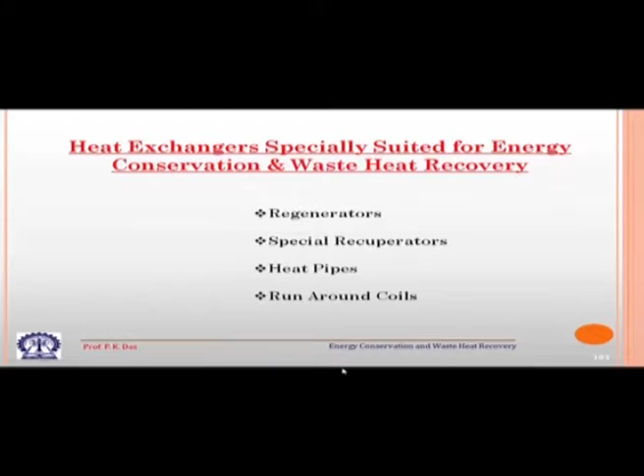So let us look into the slide. Heat exchangers specially suited for energy conservation and waste heat recovery: first type are regenerators, then there are certain special recuperators, one or two I will discuss, then heat pipes, and then run around coils.

Out of this, heat pipes are very special. They are used for different kinds of industrial applications and obviously they are very good devices for waste heat recovery and energy conservation. I will not discuss this - the other instructor, Professor Anandaroop Bhattacharya, will talk about heat pipes in detail and you will see how these unique heat exchange devices can be utilized for waste heat recovery.

So we will start with regenerator. Now, regenerators are of different types. Regenerator means a kind of heat exchanger in which the heat transfer is indirect, that means the two fluid streams are not mixing with each other, nor are they exchanging heat across some sort of a solid barrier continuously.

What is the working principle of a regenerator? First, let us say there is a hot stream. We need to extract a certain amount of heat from that hot stream. So the hot stream is made to pass through some matrix or storage material.

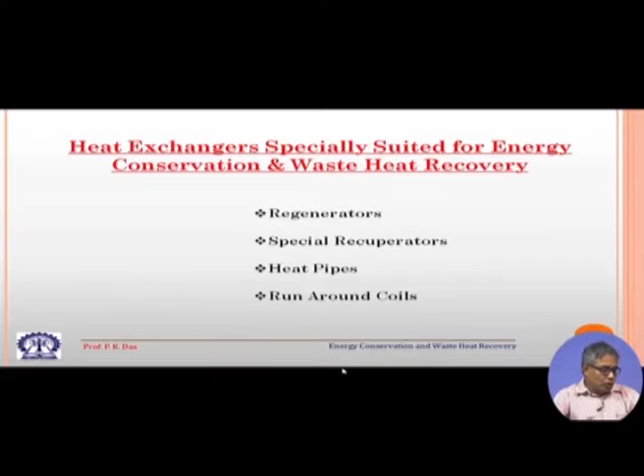So in a regenerator, this storage material is very important and that is sometimes also called a matrix, as I have mentioned. The matrix could be stationary, or we can have some sort of rotation of the matrix. So let us explain this with the help of a diagram.

So first we can see the fixed twin bed regenerator, and in these, two box kind of arrangements are called beds. In this bed we have got storage material or matrix. So generally these are porous material.

So they will have a solid component which can store thermal energy - they should be good in storing thermal energy. At the same time, these beds will have porosity or some sort of interconnected channels through which the fluid stream can pass, and in most applications as fluid stream we are having gas - some sort of gas as fluid stream, or we are having two fluid streams, so two gas streams we are having.

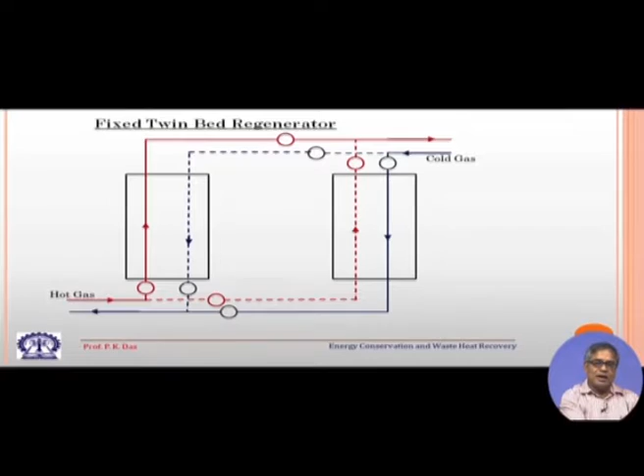Now, what is the advantage of using this storage material is that the matrix construction is such that it will give very large residence time and very intimate contact between the solid and the flowing gas, which is not possible when there is a flow of two gas streams and they are separated by some solid wall, which is there in most of the other heat exchangers.

So if I have to explain the working principle of this fixed twin bed regenerator - let us say this is a fixed bed, so some hot gas is coming. In the gas stream, this red line is the hot gas line. In this line there are a number of valves. Let us say what we do: we close this valve and we open this valve.

So the gas stream is now made to pass through this first bed - it is made to pass through this first bed and then it is passing through this. Here this valve is closed, this valve is open, so the gas stream is going out, but when the gas stream is going out, already we have extracted a certain amount of heat, and that is being kept stored within the storage material in the first bed.

Now there is a cold stream also. Once the hot gas stream has passed through this first bed, the cold stream follows this dotted line. This valve has been opened, this valve has also been opened, but these two valves are closed. So the cold stream is coming through this dotted line and passing through this first bed. The first bed, when the cold stream passes through it, is already very hot, so the cold stream will pick up certain thermal energy, and now I have recovered certain amount of thermal energy which could have gone as exhaust with the hot gas, and that can be utilized.

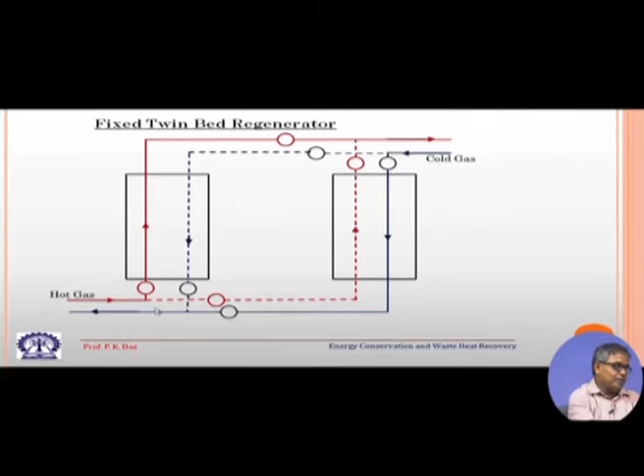But when the cold stream is passing through this first bed, what is the hot gas stream doing? The hot gas stream is bypassing the first bed, but it is passing through the second bed. So when the cold stream is passing through the first bed, heat is extracted from the first bed by the cold stream, but at that time the second bed is being heated and is in the process of being made ready, so that at the next instant the cold gas stream will pass through it and pick up certain amount of thermal energy. So this goes on.

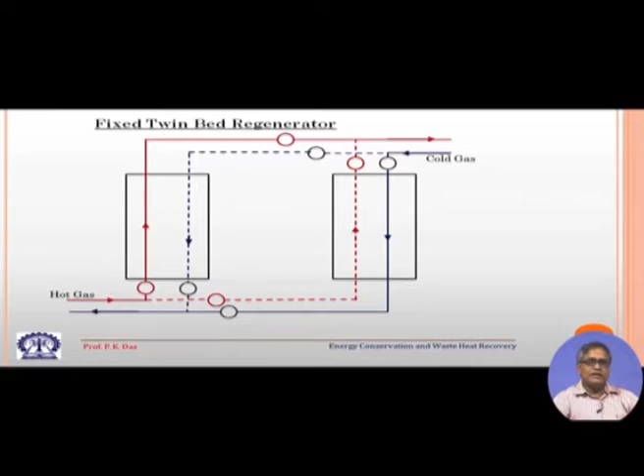By switching these valves, the hot gas stream is directed once through the first bed, next through the second bed, and the cold gas is directed once through the second bed and next through the first bed. This continues, and there could be more number of beds. The simplest is the twin bed regenerator, but there could be more number of beds, and by that we can get a good amount of heat exchange or thermal energy recovery from the hot stream to the cold stream.

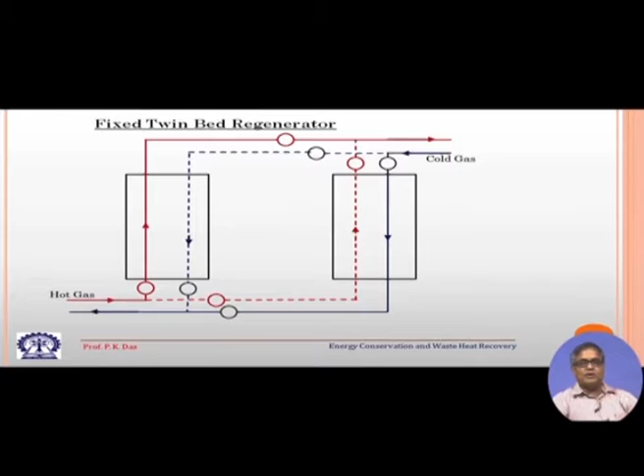Now this is one arrangement, and here these valve operations are to be done, generally automatically. One needs to know how much time one gas stream should pass through a particular bed, and accordingly the valves are to be operated.

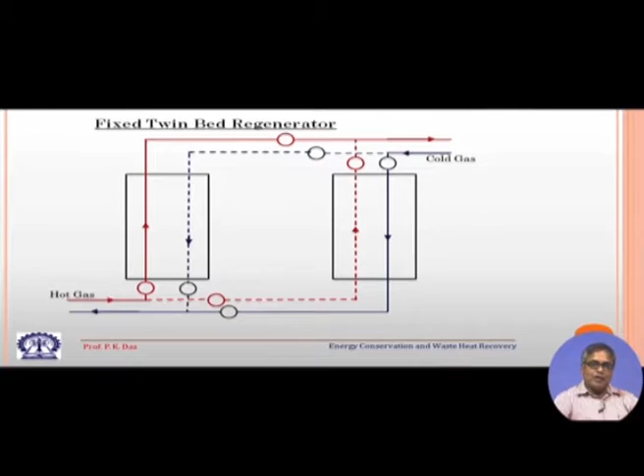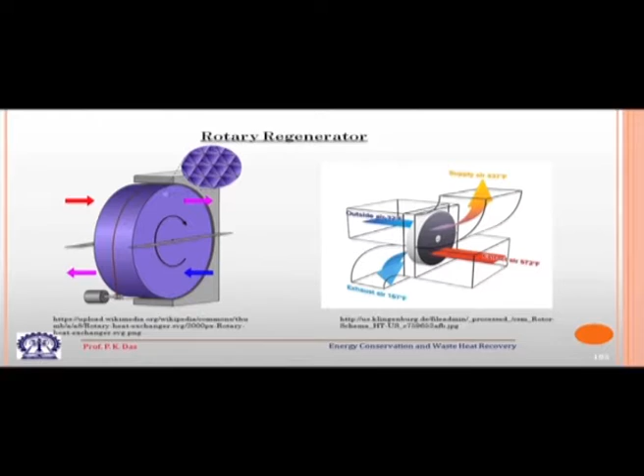In our earlier application, when we looked at the fixed bed kind of regenerator, we saw that the beds are fixed and the fluid switches off from one bed to another. Here the fluid flow path remains constant, there is no switching off for the path of the fluid streams, but the regenerator is not fixed, it goes on moving in a circular geometry, so it goes on rotating. This is for recovery of thermal energy.

There are designs where this matrix material is coated with some sort of special chemicals, so some amount of latent heat also can be utilized. Those special designs are possible. So both sensible and latent heat transfer is possible with the design modification of this rotary regenerator.

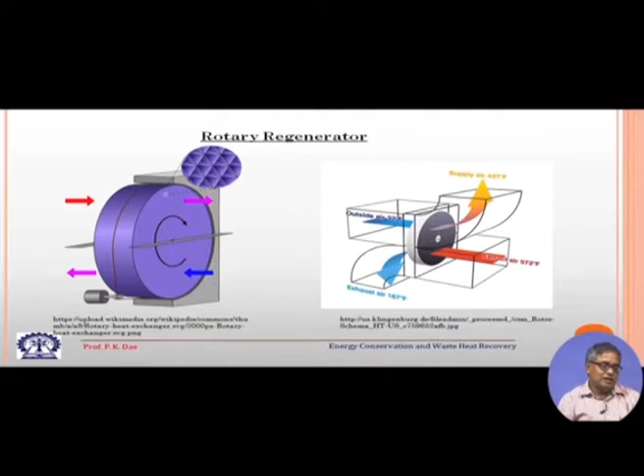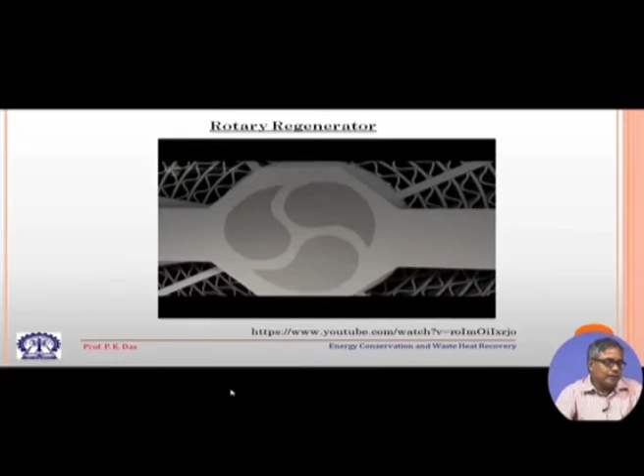With this, there is a small animation which I like to run for you. It is self explanatory and you can see what is the physical construction, how the gas streams flow through it.

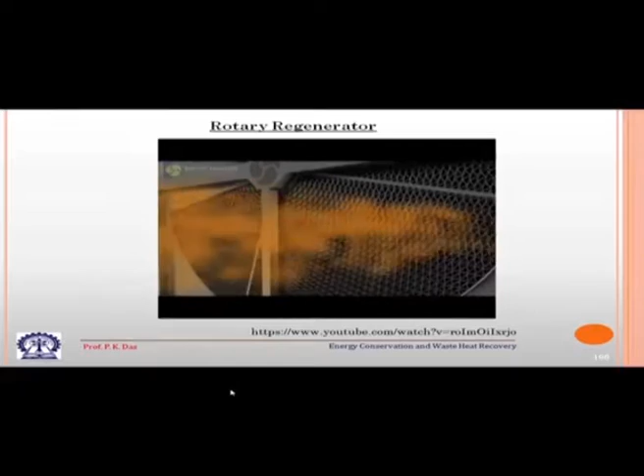So this gives us some idea regarding the rotary regenerators. So rotary regenerator has got a wheel which rotates, and that is why it is also called heat wheel.

Almost similar kind of construction, but a slightly different design is possible: regenerator with a rotary hood. Here also we are having some sort of a wheel for regenerator, and this wheel will have matrix.

We have got fixed cold gas path and hot gas path. So you can see this is the hot gas path and this is the cold gas path, but there will be a rotating hood or rotary hood, shown like this. This goes on rotating, at one instant of time or for some duration this will be on this side, and for the rest of the duration it will be on the other side.

When it is on this side, let us say cold air is coming in, and the cold air has to go through this path and pass through the matrix material, which is already heated up by the hot gas. So the cold air will pick up certain amount of thermal energy, its temperature will increase, and warm air will go out.

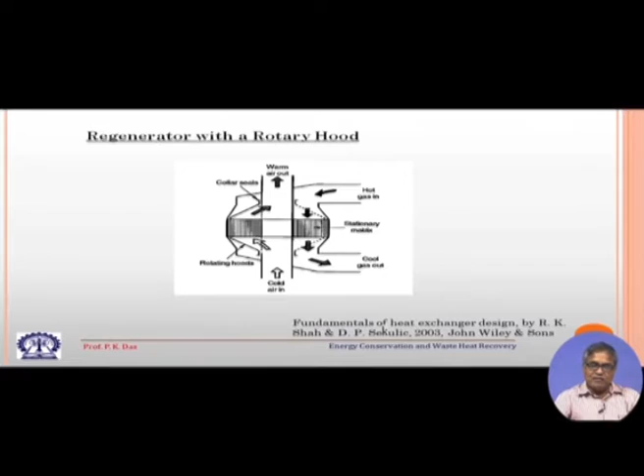For this kind of regenerator, the speed of rotation is very low, because there should be good amount of time given for the heat exchange to take place between the flowing gas stream and the matrix material. The wheels are very large, the gas velocity is also low, so that good amount of heat exchange takes place.

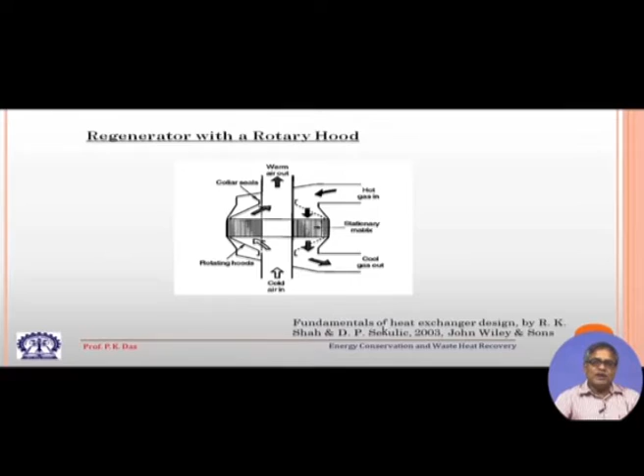One can estimate the heat transfer from regenerator or heat wheel. The analysis is made with lot of simplification. We are not going through the analysis, but I like to give you the relationship, which is approximate, but it gives you some idea on which parameters the rate of heat transfer depends.

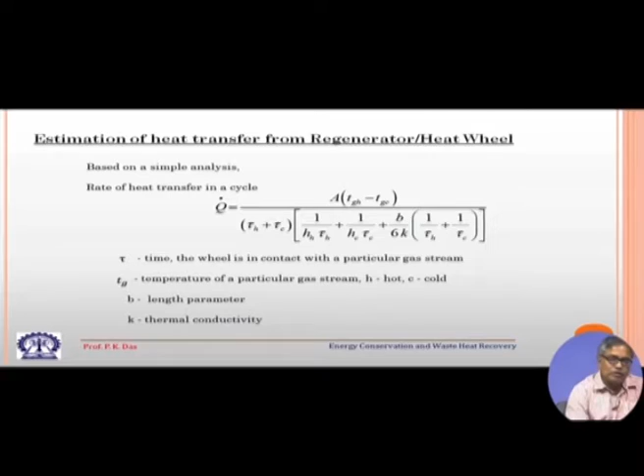With this we have got some idea regarding the regenerator, which could be fixed bed type or which could be a rotating bed type. So there are other kinds of design also we have seen.

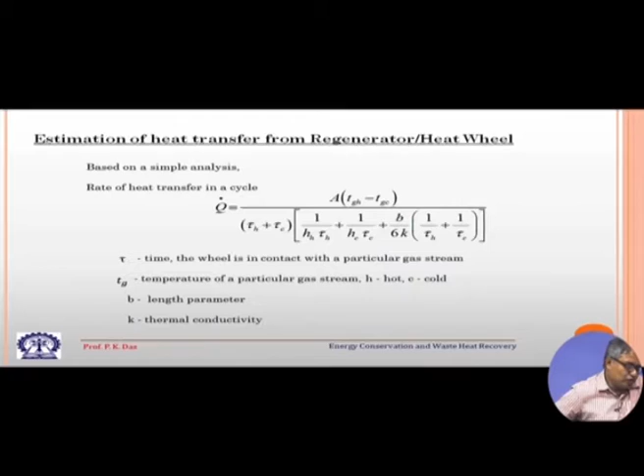With that, let us go to special types of recuperator. Now, if we see heat exchangers, there are different ways of classifying heat exchanger. One way of classifying heat exchanger is that we can classify it as recuperators and regenerators.

Recuperators means continuously there will be heat exchange between the cold fluid and the hot fluid without having any intermediate storage medium. There could be an intermediate solid medium through which heat transfer is taking place, because we cannot allow, in most cases, the two fluid streams to mix. So there could be a solid barrier between them through which heat transfer is taking place, but this heat transfer is not via a storage medium. So this type of heat exchanger is called a recuperator. So all the shell and tube heat exchanger, the example we have picked up, the plate type heat exchanger, the example I have shown, or the plate fin heat exchanger, these are all recuperators.

There could be another kind of heat exchanger which just now we have discussed, that is the regenerator. So the regenerators are heat exchangers where there is a storage medium, heat transfer is from the hot fluid to the cold fluid via a storage medium. So for some time there will be heat storage from a fluid stream to the storage medium or matrix, and then for some time the stored heat will be transferred to the cold stream.

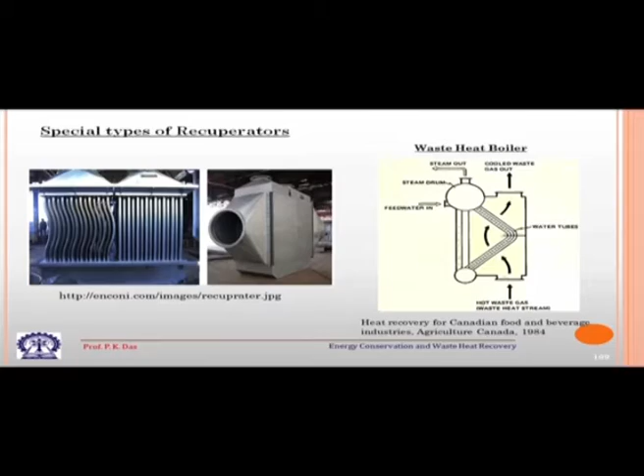Economizers will again have this tubular structure, whereas air preheaters in many cases can have a tubular structure, or they can have some sort of regenerative kind of principle for extracting waste heat.

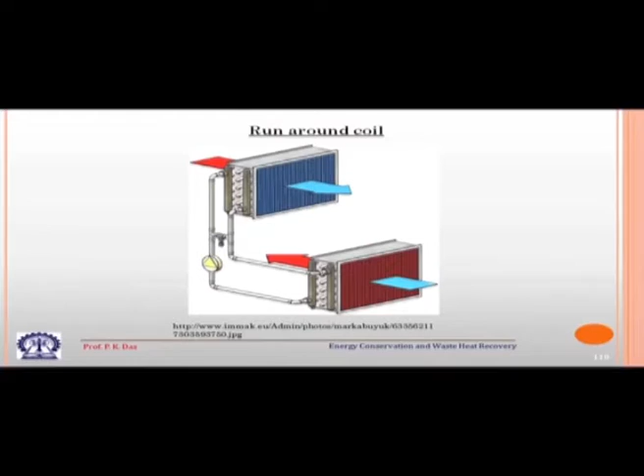Now let us go back and see another kind of heat exchanger, which is called a run around coil, or sometimes it is called a fluid coupled heat exchanger.

Let us say in a plant there are two streams, one hot and another cold. We have shown a hot stream here that is coming, and we have also shown a cold stream that is coming. But the hot stream and cold stream in the plant are not side by side, they are far apart.

If they are far apart, then what will happen? We cannot exchange heat with the help of a heat exchanger directly from the hot stream to the cold stream, and their distance is so large that we cannot have a regenerative kind of heat exchanger either, for this hot stream and cold stream which are physically not close.

But what we can have for the hot stream is a heat exchanger, and here the heat given by the hot stream will be picked up by some fluid, preferably a liquid, and then that hot liquid will give heat to the cold stream, and certain amount of heat exchange becomes possible between the hot stream and the cold stream. So there is a coil running around from the hot stream to the cold stream.

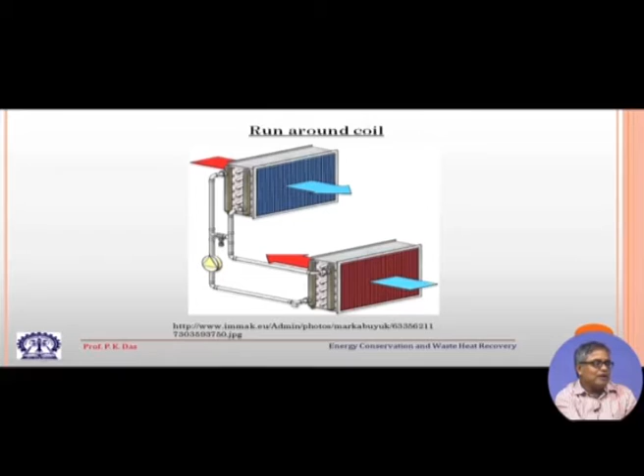So basically we are having two heat exchangers, not a single heat exchanger. Both of them are recuperators, coupled by a fluid stream.

Now, this is a schematic arrangement of the fluid coupled heat exchanger. Hot gas is coming here with a temperature TH1, and it is going out with a temperature TH2.

The cold gas is coming in with a temperature Tc2 - mind it, we have written Tc2, not Tc1 - and it is coming out with Tc1. Then the fluid which is moving through this coil, in some sort of loop, is entering with...

This is called a secondary fluid. It is entering the hot side heat exchanger with Ts2, coming out in heated condition with a temperature Ts1. So it is entering the cold side heat exchanger with a temperature Ts1 and coming out with a temperature Ts2 from the cold side heat exchanger.

So, the nomenclature or norm we have followed is that we have used subscript 1 for high temperature and 2 for low temperature. Now in this kind of arrangement, two heat exchangers are involved, and in between, a moving fluid in a loop is involved.

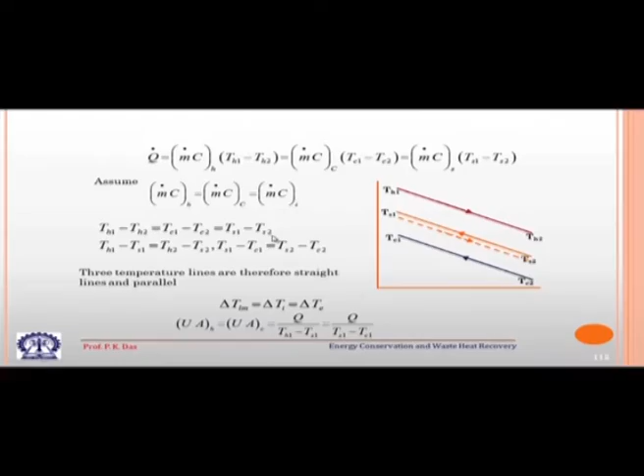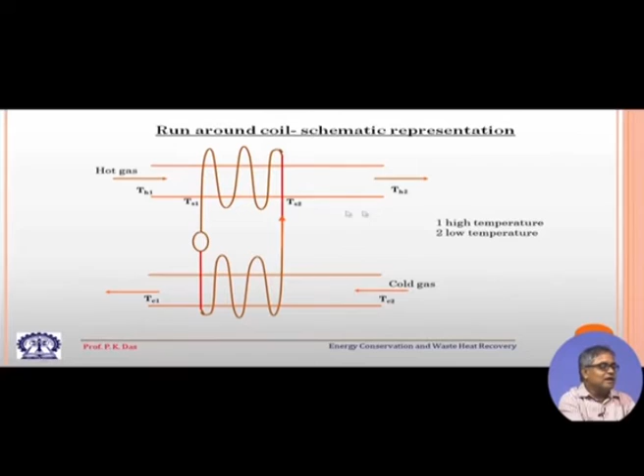If we assume this, then if we assume counter current flow, one can also do the analysis for parallel flow. If we assume counter current flow, going back to our previous figure, you see it is a counter current flow, hot gas passes like this and the secondary fluid passes like this. So, if we assume counter current flow, then we get the temperature change along the length of the heat exchanger as a linear temperature change. Not only that, for hot gas stream it will be a straight line, for cold gas stream this will be a straight line, and for the intermediate fluid that will be another straight line. So all three straight lines should be parallel.

What have we done? Let me explain it. These first two streams, this orange color, that is your intermediate fluid. So this red one and the orange one with solid line constitute the hot end heat exchanger, and the orange line with broken line and the blue solid line constitute another heat exchanger at the cold end. So both of them are counter current heat exchangers, and the temperature change is linear in both the heat exchangers for all three fluids.

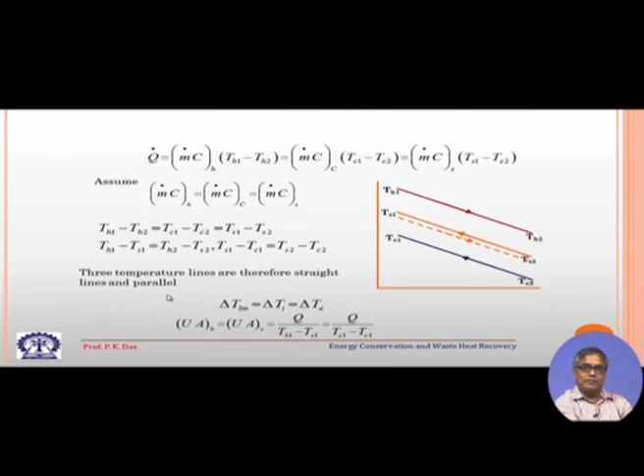So, with this we will get, also we can make some sort of a simplification, TH1 minus TS1 is equal to TH2 minus TS2. That means this end and this end delta T are the same. That is what I wanted to explain so far. So the three temperature lines are therefore straight lines and parallel. So let us stop over here and we will continue with this analysis in our next class.